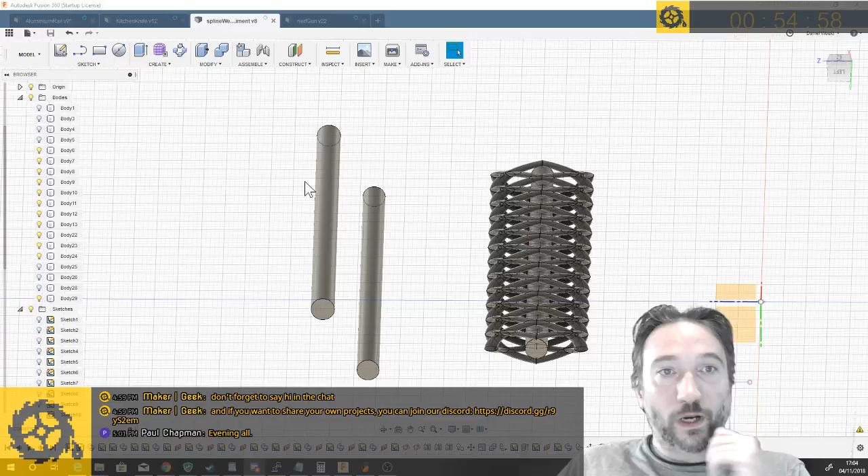Right, let's just get on, plunge right in. Five minutes in already, no time to waste. I did do some off-camera fiddling with stuff today.

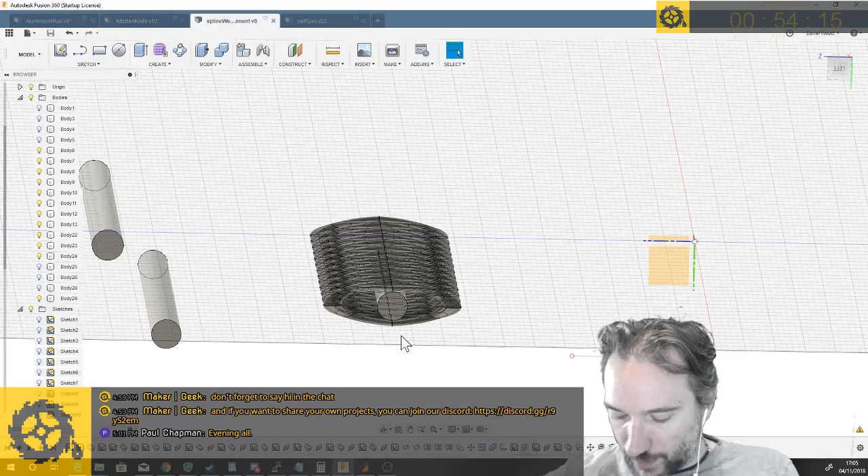So this is my little experiment pad where I've been playing with different kinds of latticey interlocking stuff. I came up with this fella, which I'm quite happy with, and it probably represents what I could have done in the first place - which I hadn't thought about. I feel like Philip, who's in the chat, did say right at the beginning of me playing with this, 'hey, why don't you use spirals, interlocking?' And I thought, well, I don't want it to be so consistent - I guess spirals are a lot rounder than I wanted.

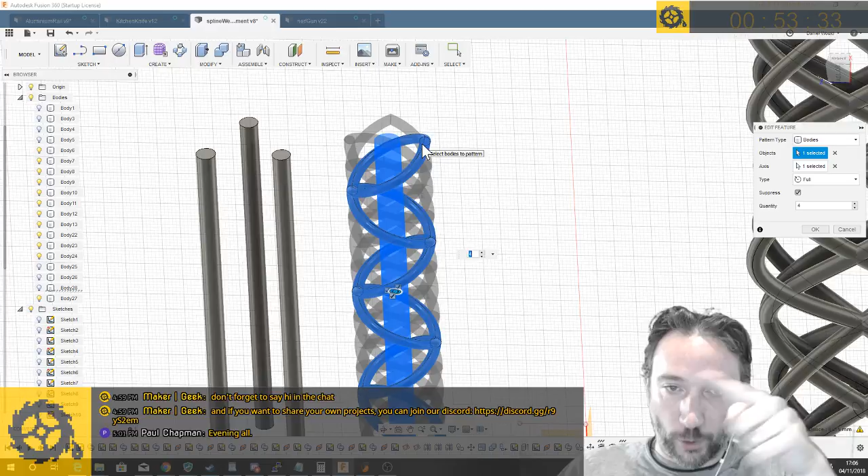What I realized today was, of course, I could do spirals, which is exactly how I created this. Created a couple, flipped them - in fact I ended up doing a rotation job, I think. Here you can see, if I edit this feature, you can get back to see how I ended up having a couple that I just interlocked and rotated. In fact, I didn't mirror them - I just created two and made them rotate in opposite directions using that tool. Then I selected them, created a cylinder so I could have an axis down the middle, and made 4 copies, which gave me this interesting tube effect.

But then what I did was a non-linear scale, or non-uniform scale I should say - I scaled in the x-axis down to about 30% and left everything else as it was, to leave it with this kind of funky squashed thing. Then I just put a cylinder down the middle. Quite happy with how that looks. That may also feature later with the NERF gun. But that's probably all I'm going to say about that for now.

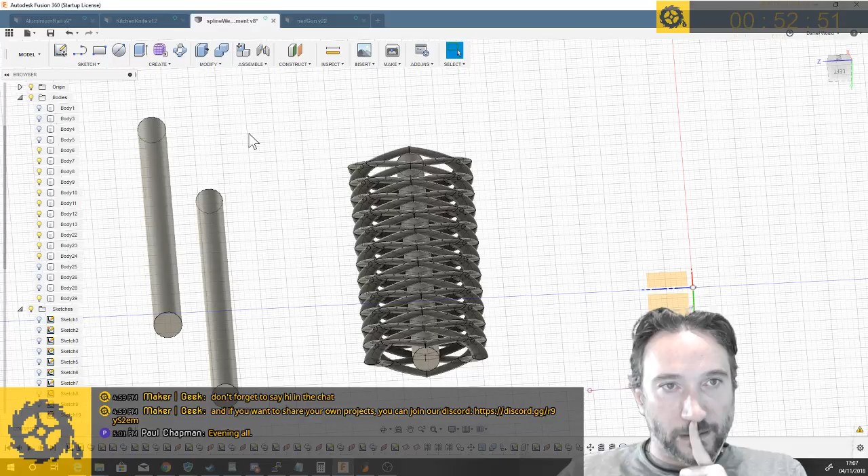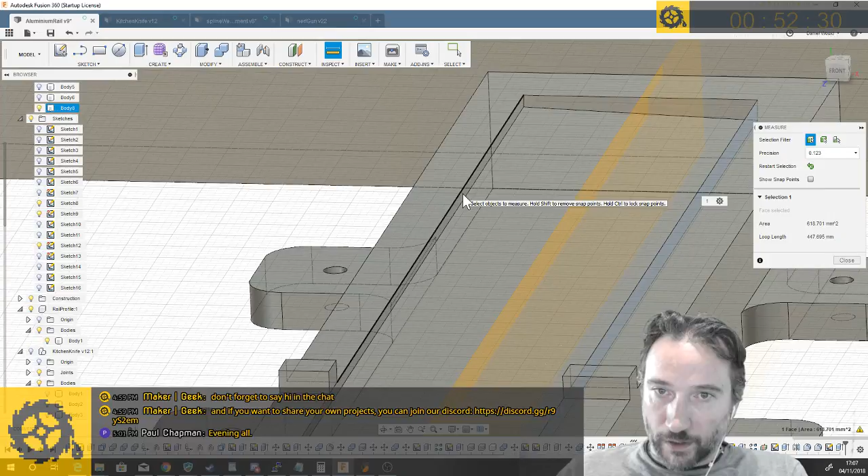Let's go check the bevel here. I want to double check that I didn't just screw this model up, which led to it being the wrong size. So let's measure between that surface and that surface. So yeah, the model is right - that should be 30 mil. But that is not how it came out. That's interesting, that is very interesting.

I've not come up against precision issues before with the 3D printer, but that is definitely at least half a mil off from what it should be. So I can make it slightly bigger, give myself a little room, and reprint it. But maybe I should also investigate whether I'm getting any slippage in, I guess it would be the y-axis on the 3D printer that would cause that. It's very consistent - it's not warped, it's pretty straight. It's just not quite right.

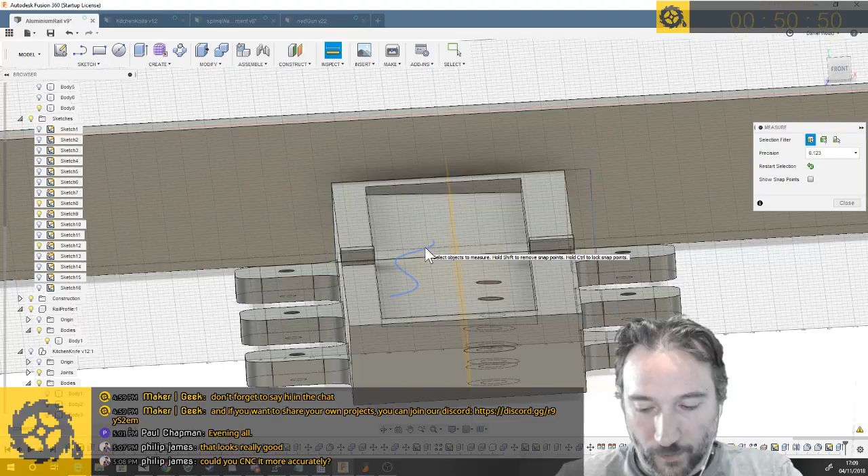Okay, because what I was going to do, assuming that was all going to work, was create the second one of these - the version starting from a blank piece of tool steel - and the second version would need the support for the first bevel on the underside. Philip asked, could I CNC it more accurately? With my CNC machine, not really - I could, but this is not actually a straight cut, it's an angled cut, and obviously I can't do the angled cut on the CNC machine. The whole point of this was to be a precise support for the specific angle of the bevel - that was the thinking.

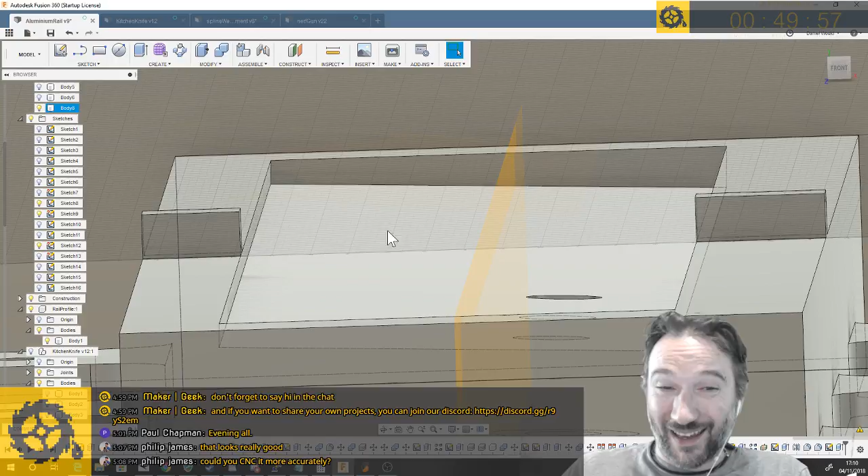So it's only half a mil, so I might just bolt it in place anyway. In theory those bolts need to be strong enough to hold, or held tightly enough that it's not going to move under filing anyway. The other thing is I put these raised blocks in, thinking that would - if I switch on the knife for a second - line up with this hilt section and help make sure I have a stop block that I don't over-file past, to get that nice clean line there.

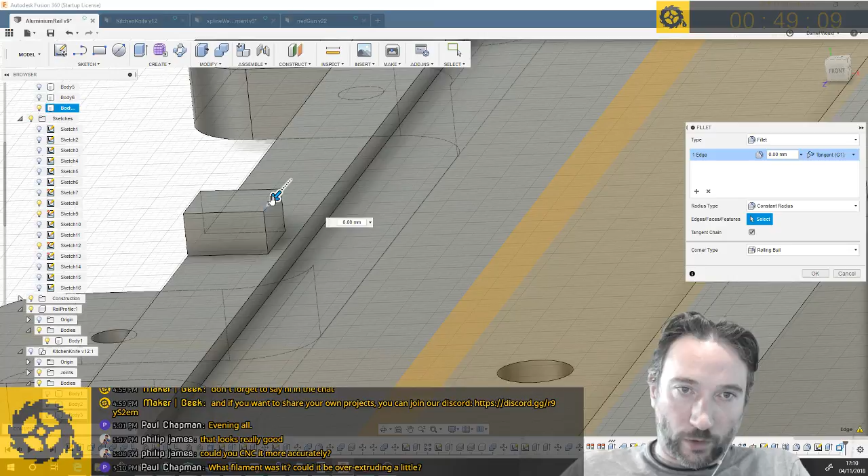But that's actually a little bit close, and it made it a bit difficult to get the metal even down past this point, so I'm just going to tweak this thing quickly. Let's drop it back by, say, 1 mil. Actually, I can probably even chamfer or bevel off that corner a little bit - that doesn't matter. And if I offset that face back by 0.5, that should be enough. I'll worry about whether my printer is inaccurate later.

What filament is it? It's like the standard stuff I get off Amazon - it's like a Sunlu, is that right? Sunlu print stuff, I've got it here somewhere.

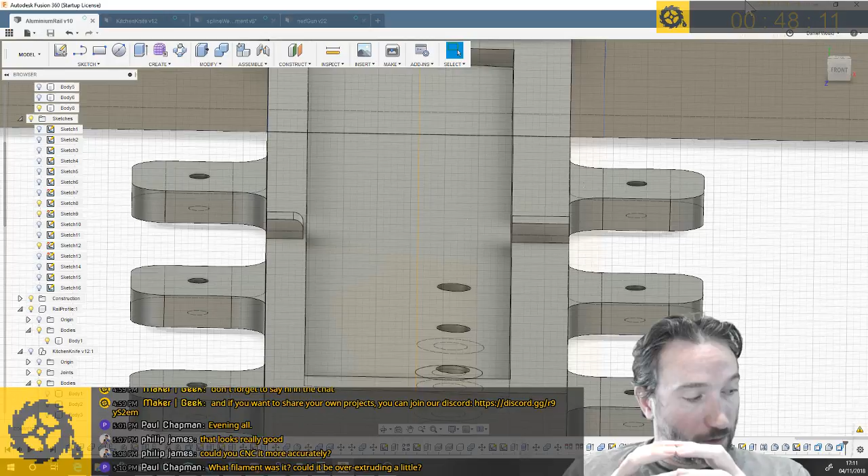It's relatively cheap off Amazon. I've not had any real problems printing stuff that needs to fit, but I'm trying to think if I've done many prints that needed to fit perfectly against a real world object. I've done a lot of prints that need to interlock with each other, and they've worked fine. Maybe it's squidged out from the lines, but it looks pretty good, has a nice clean straight edge. That said, now that I'm looking down the line, maybe there's a wee smidge of a bow to it.

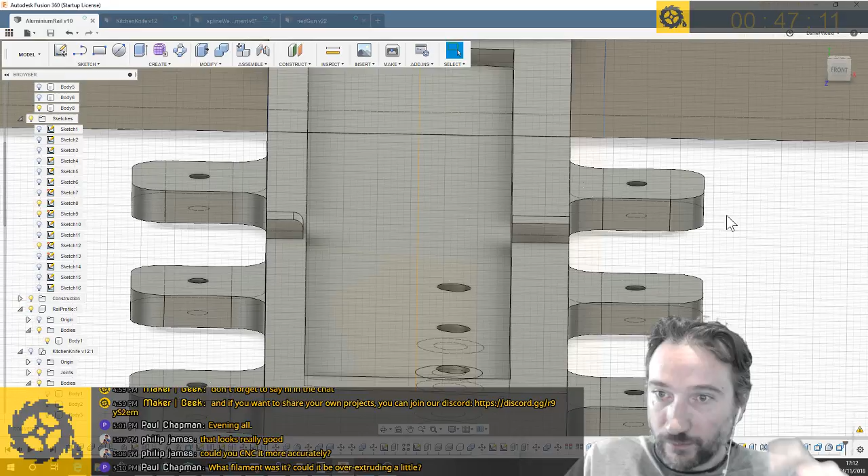Anyway, that's a 3D printing concern, we'll worry about that later. What I might do though, very quickly - now I could send this to print. I was thinking one of the things that concerns me about this idea is that it's quite a lot of plastic, a lot of which I'm sure I could get rid of. I'm just not sure I can get rid of it in a way that would make the print faster. There's always a trade-off of speed of print versus amount of plastic you're using.

I made it this full height, and actually that's another measurement I should check - it should be 28 mil, I believe. Oh no, not 28 mil, it's 28 mil minus the height of the thing below. So let me remind myself what that was. Is it 15 point something? 15.8. So for fitting within the jig.

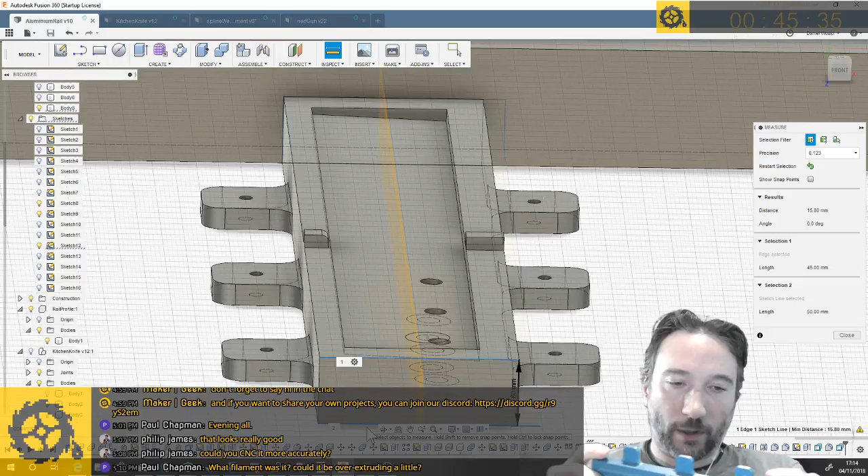I kind of wanted to 3D print the whole thing rather than just a shallow tray enough to get the bevel, because I could print just the top section and mount it on something else. Might be interesting to experiment with carving holes out, except it's only 20% infill anyway, so even though it's quite a large item, it's not like it's got a great deal of plastic in it.

It would be quicker to cut out, certainly, if I could cut this beveled angle, but short of doing an incredibly small CNC piece, I'd end up with steps along here, or I'd have to precisely mount a block at the bevel angle so this was a straight cut. I think it would be difficult to get the quality of finish on this shallow angle on my CNC, at least with the bits I have. Maybe I'm not thinking of an obvious option there. I suppose if you were cutting this way, it wouldn't be so bad.

Yeah, I don't know, I guess I'm also sticking to this idea that I kind of wanted this to be a 3D printed thing because I want my 3D printer to produce things that are helpful in this setting, and not everyone has a CNC machine. Even though I think my CNC machine was probably less expensive than the 3D printer. But there you go, right, it's part of the learning experience.

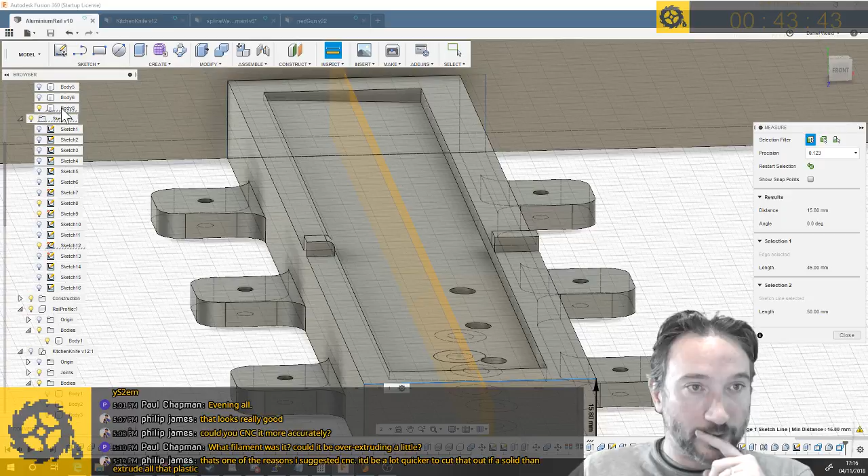So stop doing that, grab that, save it out. Medium is probably fine for the amount of detail. First side filing mount. Yes, what I should have checked is how much filament does it think that used? 27 meters, 83 grams of filament. I mean, often with a 1 kilo spool, 83 grams isn't that big of a deal.

What's that? I think they're like, it's not too bad. Let's open this bad boy up. Oh, I probably should have gotten rid of that one first. Sometimes I wish there was a way to select a side of an STL in a slicer and say put this on the deck, rather than me having to remember which axis to rotate around.

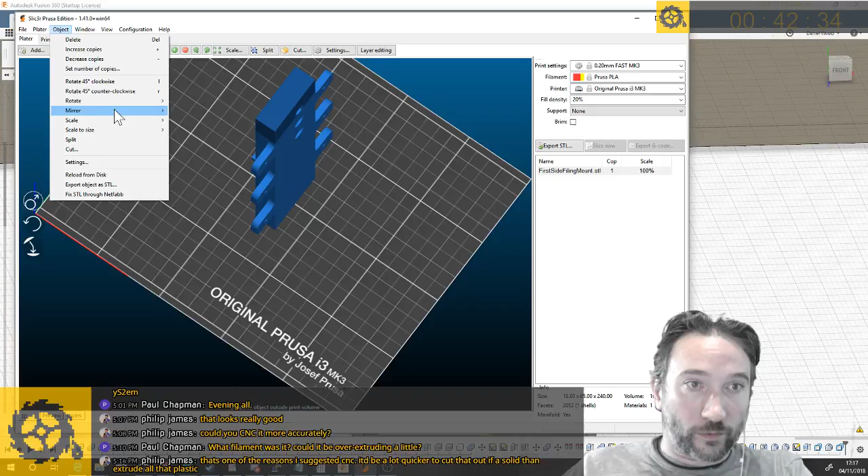Not that one, obviously. No, rotate around Y. And I probably need to rotate around Z. There we are. Just fits on the bed. That's interesting, I didn't actually think about the bed size when I was designing this. It just happens to fit just right.

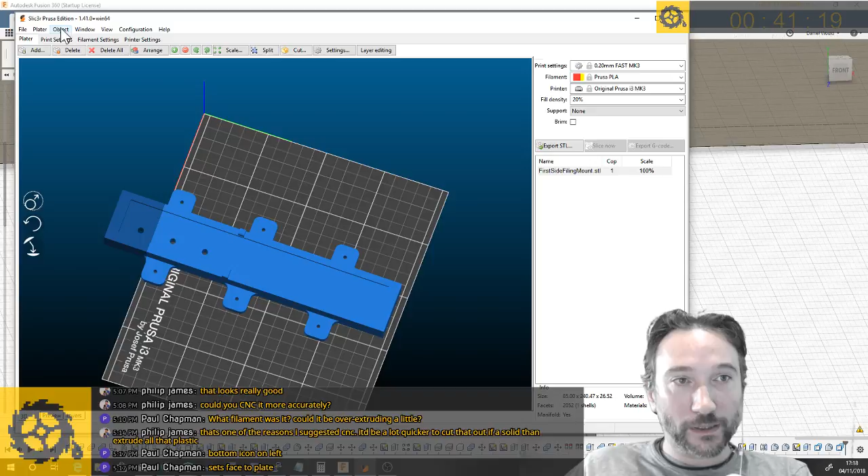Bottom left icon, bottom icon on the left. Oh, this thing, see this? I don't know if anyone listens to Reclaimed Audio podcast - they did a worth the price of entry episode this week. I think learning that right now was worth the price of entry for me. I realize that's kind of the wrong way around given that I'm hosting this thing, but worth me doing this to learn things from people who actually read the manuals. Awesome, that was good, right.

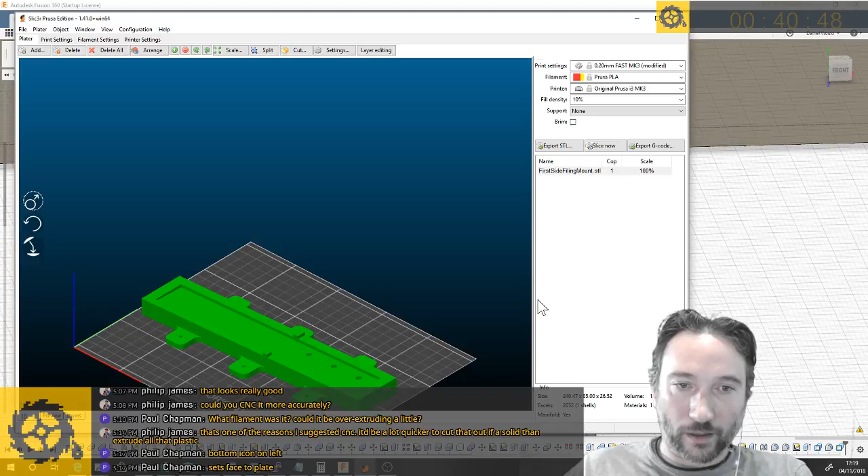Slicey. Do I even need 20% infill on this thing? Should I? Let me pull that back. I reckon 10%, I'm going to go really low density because it's just going to be screwed down and filed over - it doesn't really need to be a strong part. It's not under any kind of compressive forces or anything, or even bend forces. Let's check the preview.

Oh, that's interesting. Did I? Hang on a second. Apparently when I set something to the deck, I selected something slightly wrong. Let's try that again. That's better.

Okay, sliced out. Always check the preview. That's the lesson. Always check the preview. And there we are, looks good to me. Export. Boom.

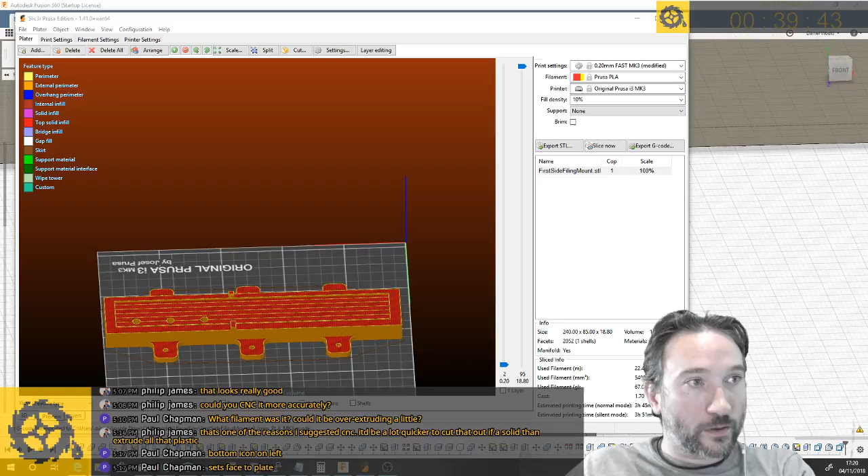Going. So terrible for a CAD based live stream. Spending time to set up the 3D printer, probably not great, but if I set it going now, it'll be ready by bedtime.

Hang on, let's get that there, do that there, replace, and eject. Fantastic. Let's do that.

I'll tell you what, I'll switch on the camera. Boom, so you can see that. And let's switch you on quickly. Just gonna wipe down the bed, set it going, and then we can get on with some

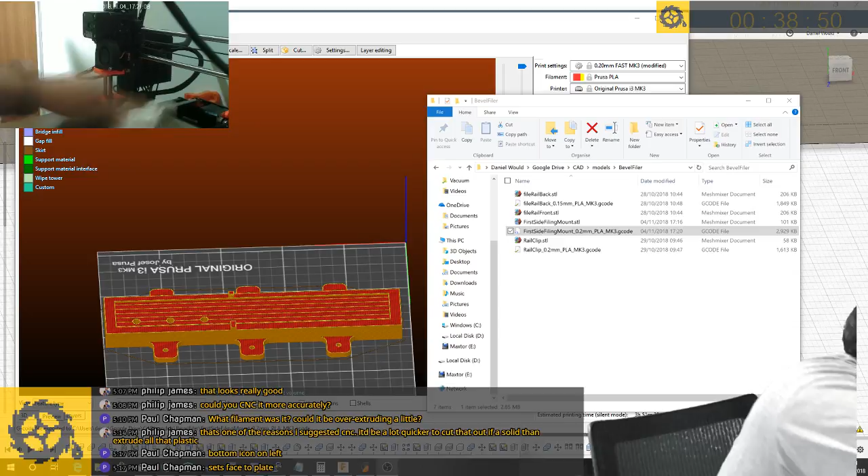Nerf gun. There we are. Always keep some rubbing alcohol in hand. Print, print, print, and go.

Right, marvellous. That can get its print on in the background, and we can return to actually doing some CAD.

So to export the STL in the same orientation as Fusion, go to Preferences, General, Default Model. See now this, I'm just learning so many useful things. General Default Model. Where am I looking? Default Orbit Type, Default Model Orientation.

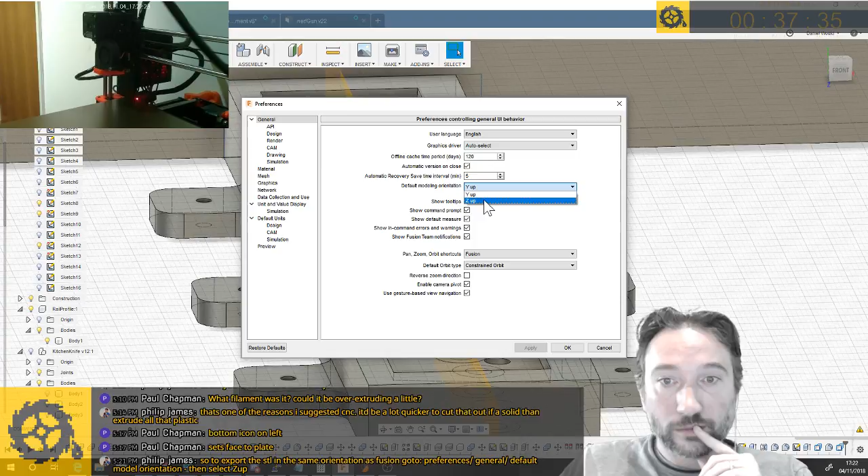Z up. How about that? I'll just do that then.

See, smart people in the world that have actually learned these things. This is probably because you guys also watch videos of people who know what they're talking about, and not just some idiot who's flailing around.

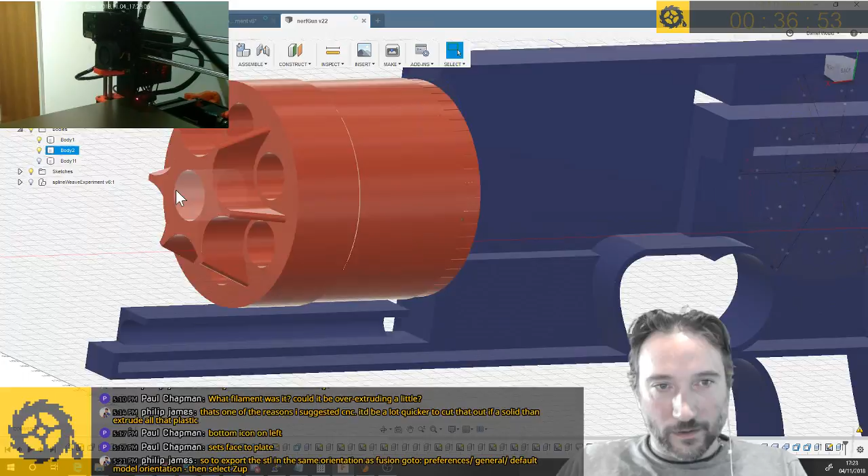Ah dear, okay, here we go. Nerf gun time. 22 minutes in, we just yesterday fixed the alignment of this fella. I think we're close enough on this model, and what I now need is to re-establish what the front of this structure is going to look like.

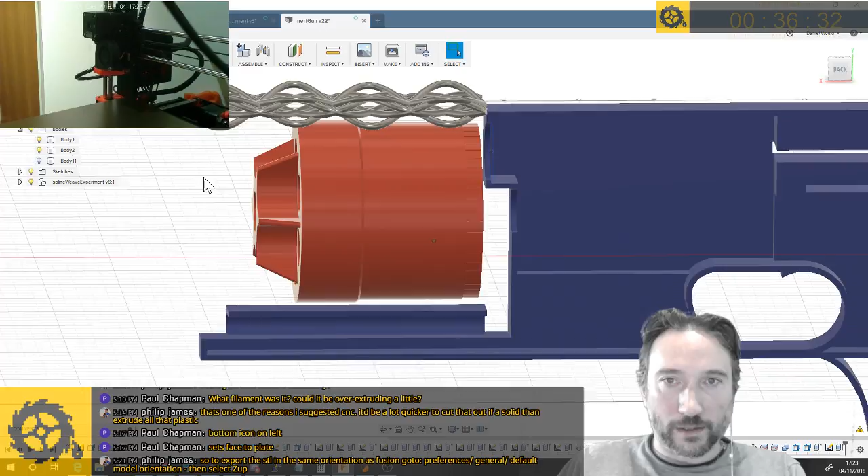So something has to come up from here and provide the front pivot point, and I need to support it across the top. Now I had been thinking about supporting it with this thing, but now I'm wondering about whether I support it with my other lattice.

Although actually the advantage of this one - oh, here we go, 3D printer is off, take that bit off - the advantage of this one is it does have this kind of natural support for this curve, so I think I might leave that in play there for the moment. It's 9 bodies, there we are.

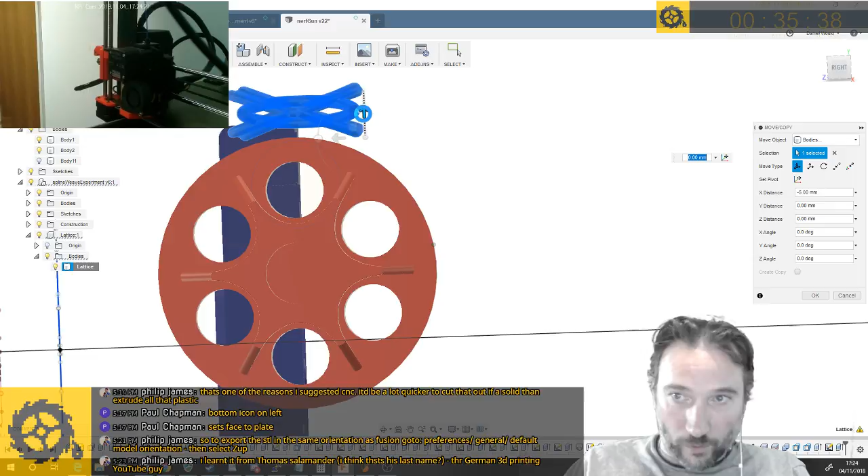Gonna move you back a wee smidge, and how far down do I think I can get away with? That might actually be as far down as I can get away with already, because I kind of need it centered.

Okay, what does that look like? German 3D printing YouTube guy. Yeah, I really ought to watch more videos. There's just no time to actually spend time in the workshop and do stuff and do this.

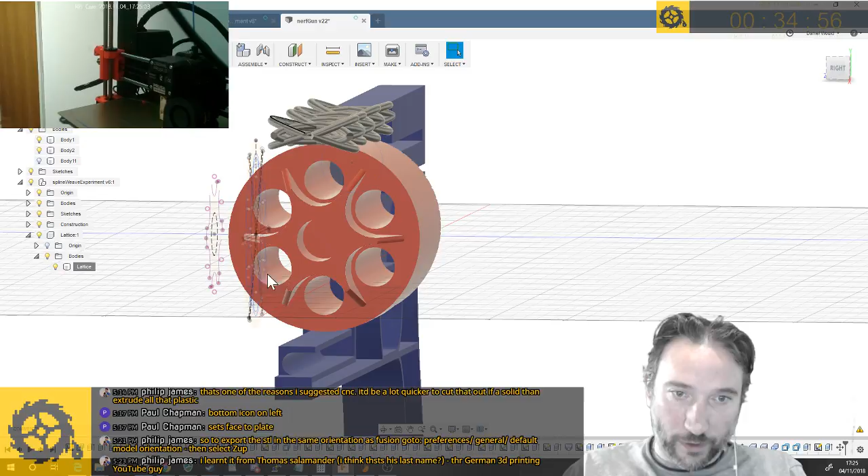Right, so I'm gonna try and create a connector that comes up to here. And I'm just thinking, what does that look like at the moment? So yeah, I haven't really thought about what I want the front design of this gun to look like.

I wonder, what if I created another lattice? Would that be crazy? I guess I'm getting to the point with this thing where it's a mixture of creating just the things that are important and creating things that are actually going to be interesting in the design.

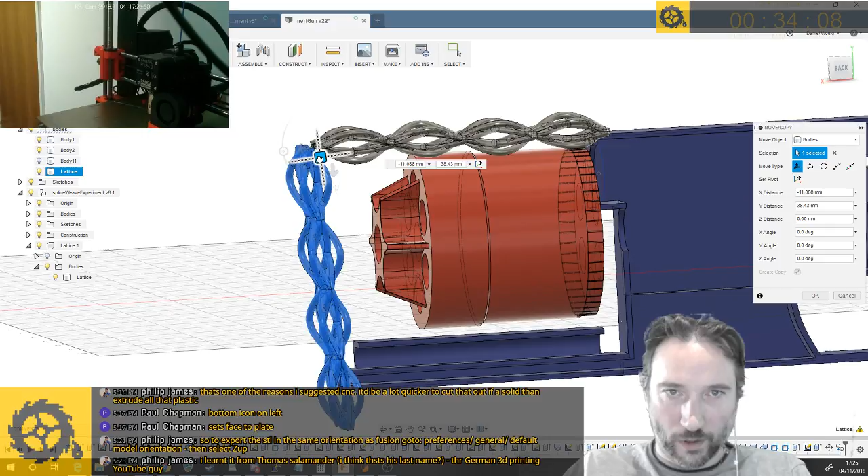I don't think this is going to look any good, but I kind of want to roll with an idea. So I guess I was thinking if I did use this mounted to there, but that would look kind of weird and wacky. I'm not sure about that.

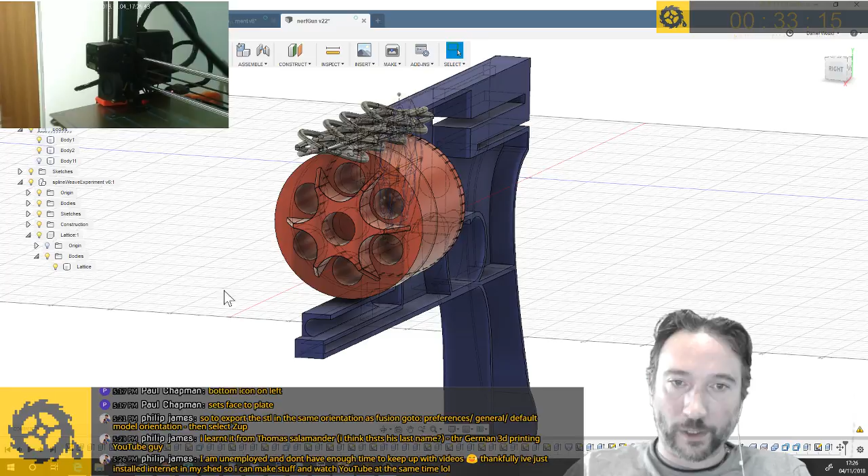Internet in the shed, now that is well worth doing. I do have internet in my workshop. Annoyingly though, I have a projector in my workshop, and I used to have it set up so I could project against something, but I fixed the lighting, got much better lighting, and moved everything around. So not only do I not really have a surface to project against anymore, it's also kind of way too bright in there for the quality of projector that I have. So that does not help.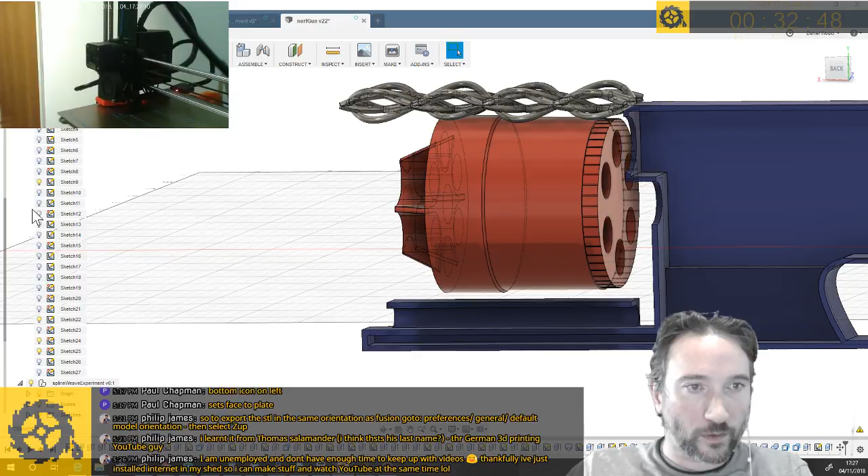Right, I am flailing a little bit because I haven't really thought about how to do this. I thought, did I not? Oh, I sketched on this surface. That's why there's nothing there, because I sketched and I didn't actually extrude anything. Right, I need...

This is just quite a narrow gauge. Let me remind myself how that fits into this. So, like that.

You're kind of... oh, dropping bits on the floor. Right, so yeah, at the moment this... oh, there we are, try and do that. This little bit here gets, I guess, clamped between the two sides of the frame.

Am I still live? Am I still here? Did that just go off the air briefly? OBS said that it just needed to reconnect. Nothing else seemed to indicate any kind of problem, but we'll see. I guess it will really be CAD like nobody's watching if OBS has disconnected me.

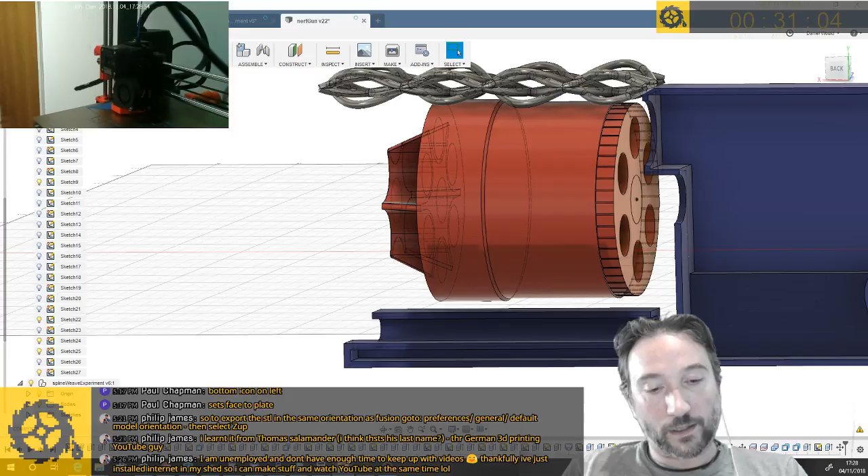So this thing is a wee shade under 8 mil. It's kind of 7 point, maybe even 7.5. Let's make it 7.5. So I'm gonna actually extrude the real thing, like a 7.5 diameter whatnot out of here.

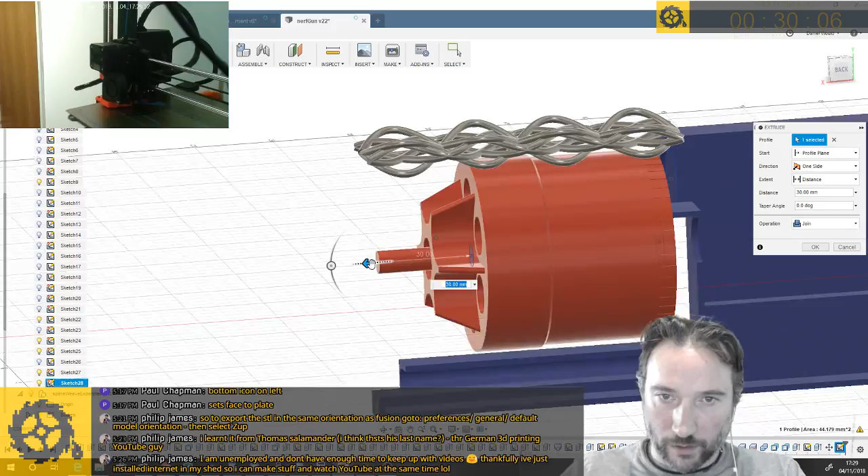It runs for me about, that looks like 15 mil proud of the top surface, and I'm now realizing that I am not doing it off of the top surface. I'm doing... well, let's just do that a second and I'll double check.

So how deep is that hole? That hole is 14 mil deep, so total extrude should have been 29. He says, pretending he can do maths. So yeah, I extruded 30. I think that needs to be 29. Right, so that needs to be captured.

And thus captured, we should be good. I'm a little bit nervous that nobody has said anything since OBS claimed that it was disconnecting me. If you are still connected and watching, do me a favor and say something in the chat. Either of the chats. Oh my goodness.

Let's have a look at, in fact, let me quickly... all good, thank goodness for that. I was worried for a second. So just quickly checking in here.

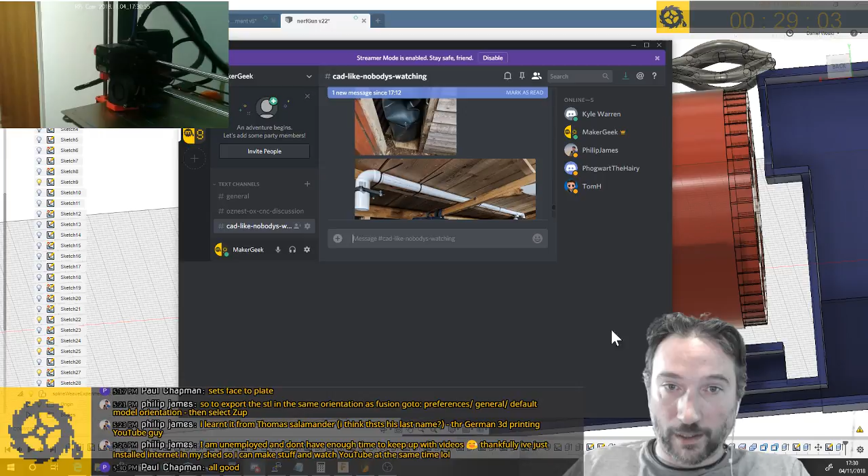Philip installed a Shopvac system not so long ago. Water butts do not make good dust collection buckets. Yeah, those dust collection buckets, they suck. In fact, I'm pretty sure that's exactly the same cyclone top that I have, and I attached mine to a fermentation bucket. That was definitely nowhere close to good enough. I ended up building out... oh, you built a box for yours. Ah, interesting, yeah, that's probably a really smart way to do that. I was like, I will not admit defeat, I've got this damn bucket. So I ended up creating wooden ribs inside of mine in order to give it the strength to resist. Wow, that is looking like some pretty serious dust collection for a shed. That's pretty cool.

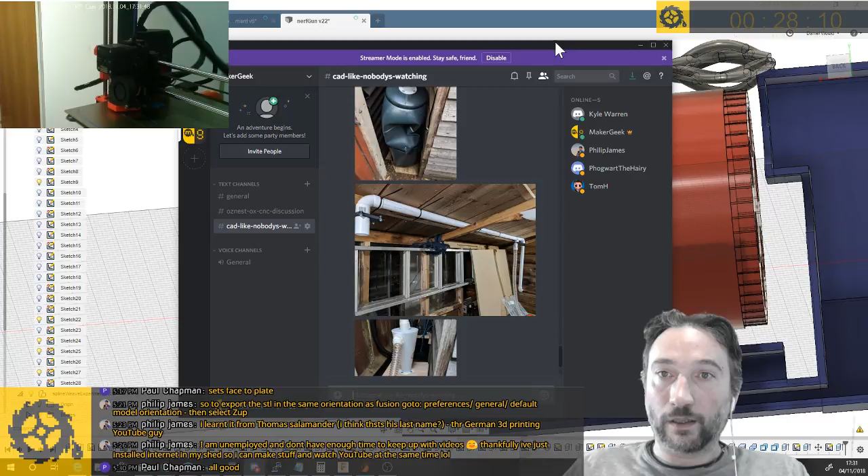That is definitely some good progress for a weekend.

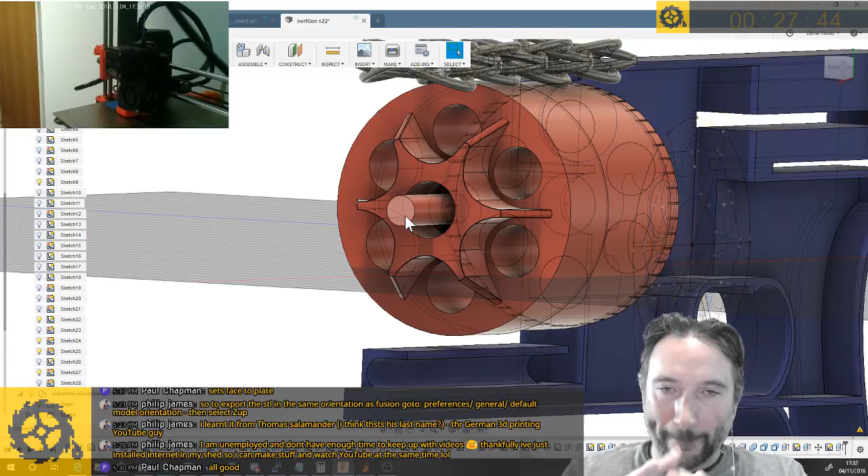Right, so back to this. We need some kind of support point, but I'm conscious that this represents the front of the gun. So what I might do is create kind of the minimum, and I'll come back and worry about embellishing any further gunness later. So that being said, it's interesting that this is a little bit further out than this.

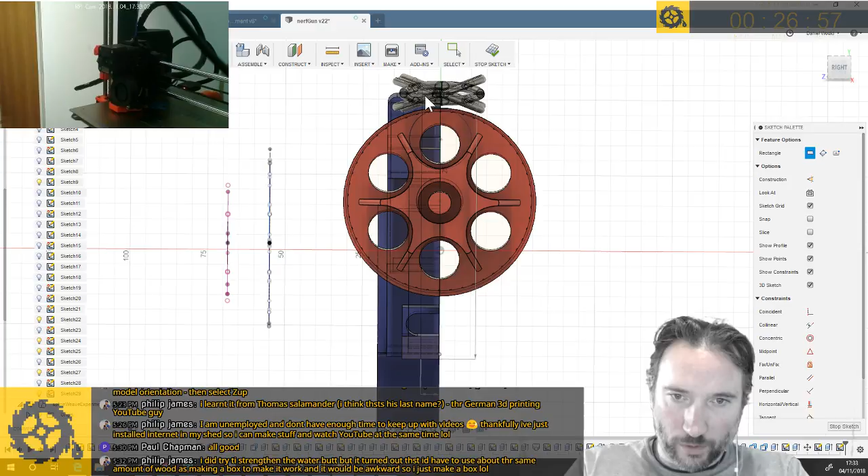Right, I'm going to sketch on this plane, and I'm gonna, in fact, yeah, if I just create up the halfway mark to about here, and we'll call it 88 mil high by 6 mil will do, and then we'll extrude that backwards.

No, not radiused, come on, extrude that. Except that can't be right because this gap needs to exist. Okay, we're gonna do it that way for the moment anyway. We'll make it a new body for the moment. We'll then use this to cut that radius out, and we'll keep the tool.

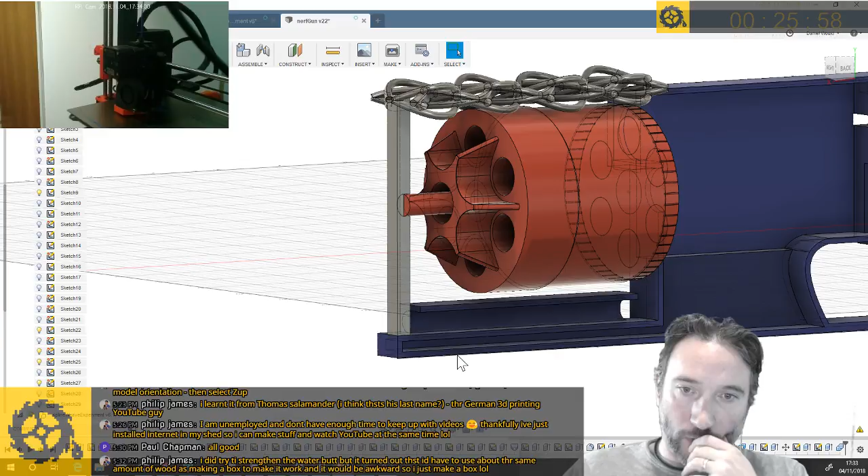Okay, and then I guess we'll join this strut to... oh, except of course, other important point, Dan, as part of your minimum viable version, that needs to not be there. So what I might do then is draw this out that way. There has to be a Y shape, I guess.

Autocorrect, like, I have no excuses, Philip. It's fine, my autocorrect is terrible, and my typing is terrible. Like I'm a dyslexic fool. I did try strengthening the water butt, but it turned out I'd have to use about the same amount. Yeah, I can see how that would work for something the size of a water butt. I ended up just having some scrap chipboard laying around, something like that, which did the business for me, but it was probably way more effort than it was worth. I should have just gotten the right thing in the first place. Had I thought about it, or indeed done any research, I would probably have discovered that sensible people do not try to use water butts for their dust collection.

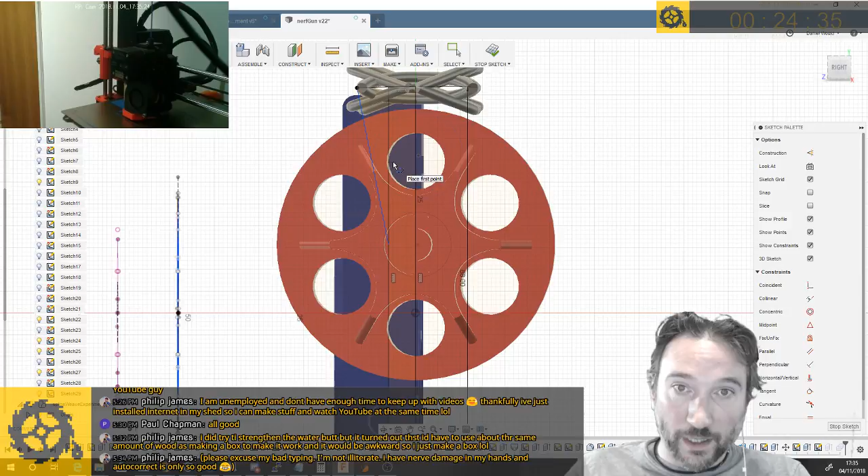Let's do that. I'm just going to improve this sketch into a Y, and let's draw another circle like this. It's kind of difficult to see, but I think if I do that and then modify my extrude to select this section and deselect... come on, I want that bit, and that bit, and that bit, and not that bit. In fact, no, not that bit either. There we are.

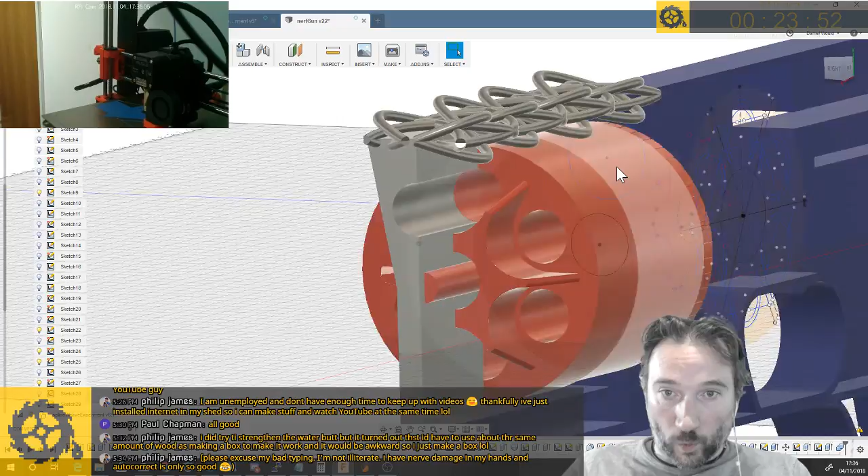Whoa, why is that now gone? Wait, what? Did I change the depth that I wanted to extrude it? How did that become minus 31?

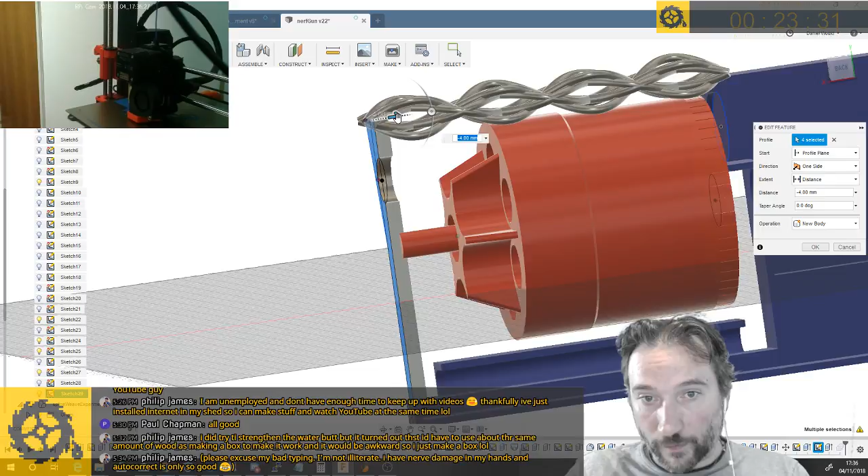That reminds me, I said I'd talk about the fact that I got into a real mess with an align yesterday, and it was pissing me off, frankly. So let's put a pin in that for a moment. Let's come back to this, in fact. What I discovered was that when I tried to do an align... can we look at the history?

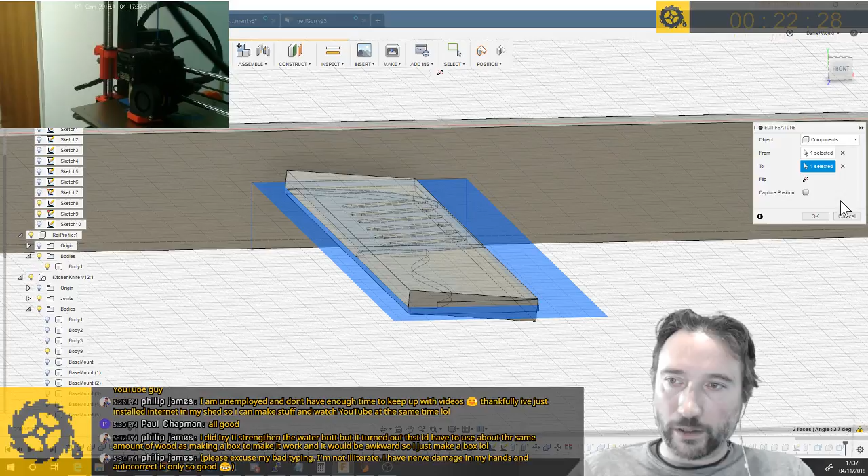So these two aligns was me fixing the problem. What I discovered was that when I did this align, by default it was selected on components, and even though it looked like it was supposed to work, when I selected OK, nothing appeared in the timeline, and it didn't act like it until I prompted a re-render, at which point it's like, oh yeah, there's no actual align in your timeline, and I didn't get any errors. So I'm pretty sure what happened was that I aligned, it looked fine, I went about my business, I did my cut, and by the time I did that, it was like, oh wait, that align didn't really exist.

So I don't really know why that happened, but that seemed to be the problem. Take that for what it's worth. It seemed like maybe that's a bug. Maybe not.

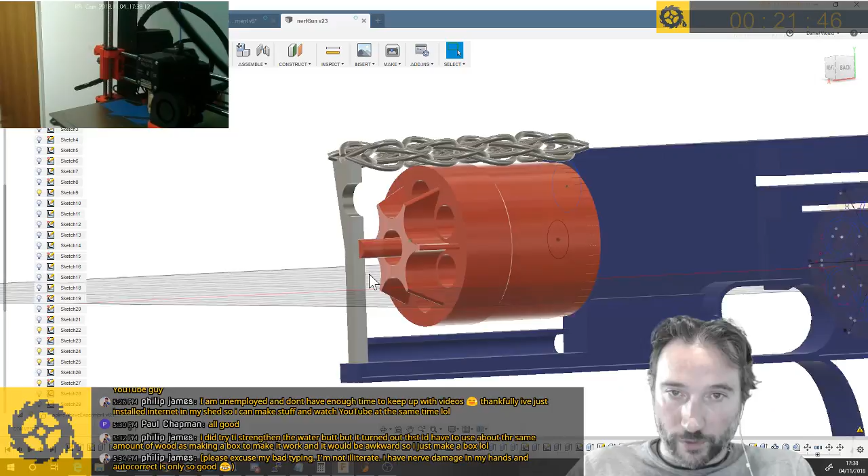So that is kind of a minimum viable whatnot for what the top of the gun, or the front of the gun, could look like. This is ugly, but that support would need to exist. This gap needs to be bigger, so I'm going to need to figure something out about that.

So this probably needs to actually curve down, because yeah, this... how do we, in fact... try not to throw things on the floor. In fact, as I say that—

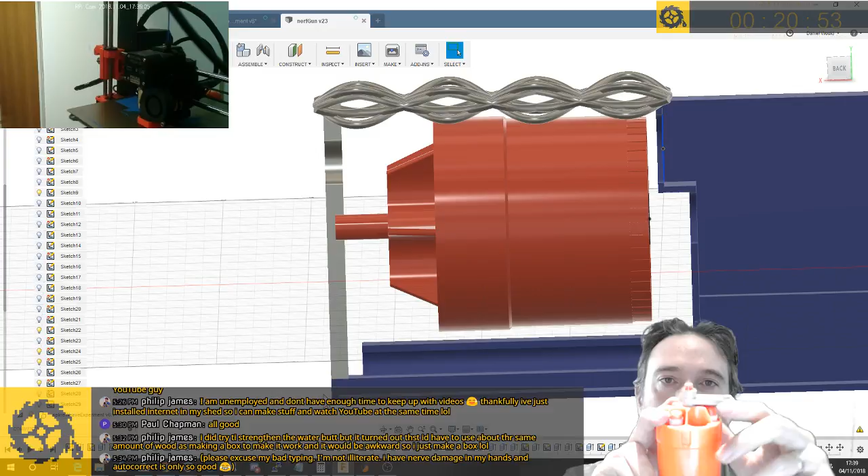That's interesting. So there's actually this plastic bracket that goes on the front of this thing, and now that I've put that in place, I'm realizing that it covers the entire height of that. No, okay, I was like, oh my goodness, I've caused problems. But I have realized that this notch only sticks out into the front of the gun when the barrel is in place, because obviously it needs to be free to fall out of the gun.

Right, of course. So when the barrel is in place, something at the back is pushing that rod through, and that's what engages it in that hole. But what that tells me is the measurement I just took for how far it sticks out is going to be completely wrong, because I didn't have it in place at the time. So it is in fact 19 mil proud of the surface when it's in place.

Now that makes sense as to why this gap would be all wrong, because this is all wrong. Right, fine.

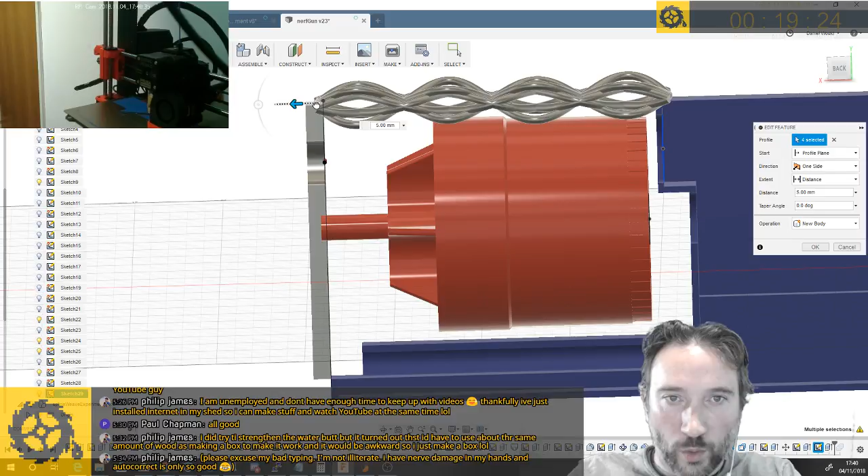What we'll do then is come back to this extrude. We'll extrude it out an extra 4 mil. That's right, isn't it? 33. So that's what you look like when you're in place. Then we'll come back to this extrude and extrude it the other way—come out that way instead of that way. And actually, now we can select that bit as well. Boom. That might be a wee bit shallow, but it'll do. Okay, that's more like it.

Let me just check a few things. Why? Oh, goodness. Just making sure there's nothing else in the Discord that I'm missing because of the scrolling. That's all good. Right.

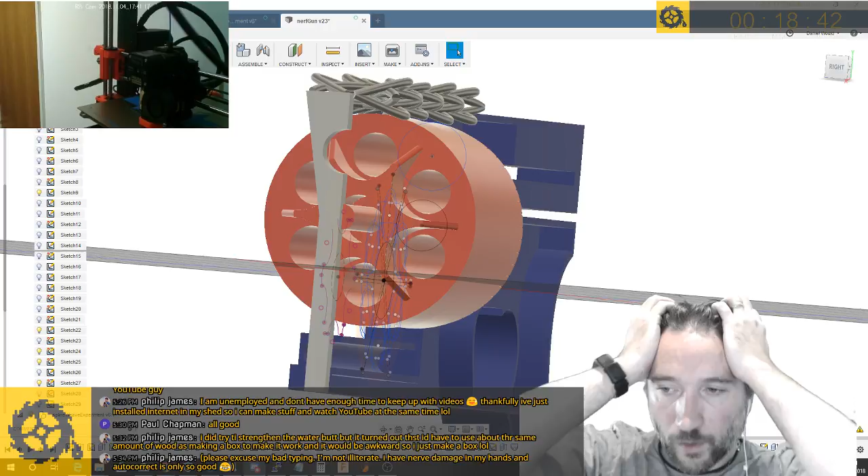How are we doing? 20 minutes. So how long ago did I start that print? It is still on the first layer. I guess the first layer is super slow to lay down. Once it's gotten past that bit, it'll pick up speed. But, right.

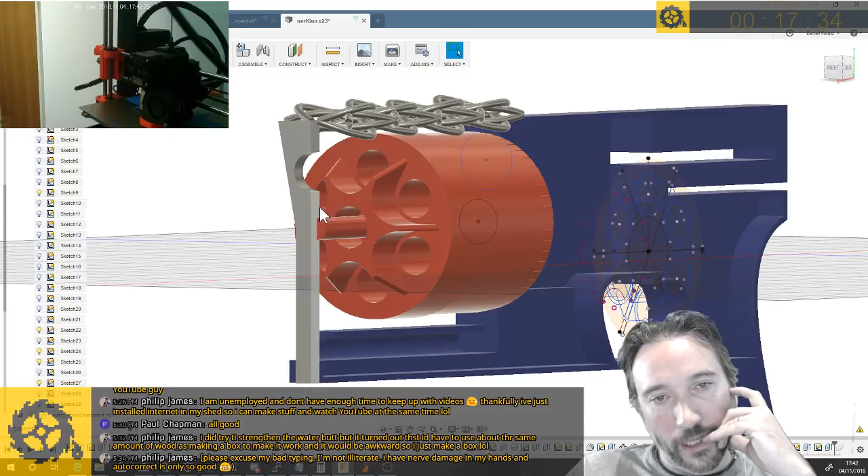So that support needed to exist. I can probably combine this with the gun itself, but I kind of want to think more about what I actually want the front of this thing to look like. I suspect, in truth, I might want this thing to be a bit more sinewy—that's not really a word—but this kind of whole structure is not ideal. I just need that support point though, don't I?

Okay, well, I guess the good news is this, I think, has space for the bits that it needs to hold. And so what I should probably do is model a couple more of the internal components that I'm going to need to keep, because that was a key element of the problem that I got into. The reason I had to fix those things in the model was because I didn't do that for some of this stuff. So what am I going to pluck out of here? I guess this thing.

This thing is the real heart of the gun. It's got the plunger and spring and whatnot, the catch that catches on the back, and this whole weird mechanism that interlocks with the barrel to turn it around.

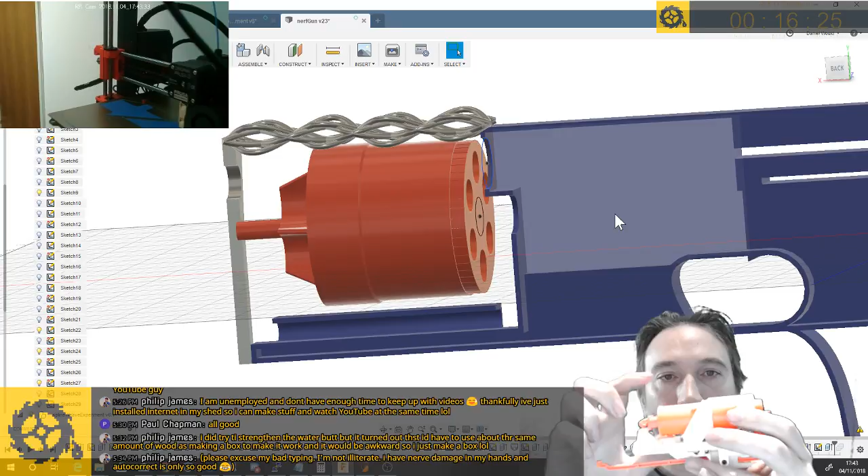So first things first, let's measure this cylinder, create that, think about what this surrounding plastic might look like. Broadly speaking, this thing is a cylinder which is 27 mil in diameter, and that bit of it at least is 85 mil long, and then there are a few bits that are slightly different diameters.

Right, let's move over here. Sketch - we'll sketch on. Oh, don't sketch on that plane actually, because it would make sense to sketch on a plane that's at least oriented with where it's going to go. We'll sketch over here though.

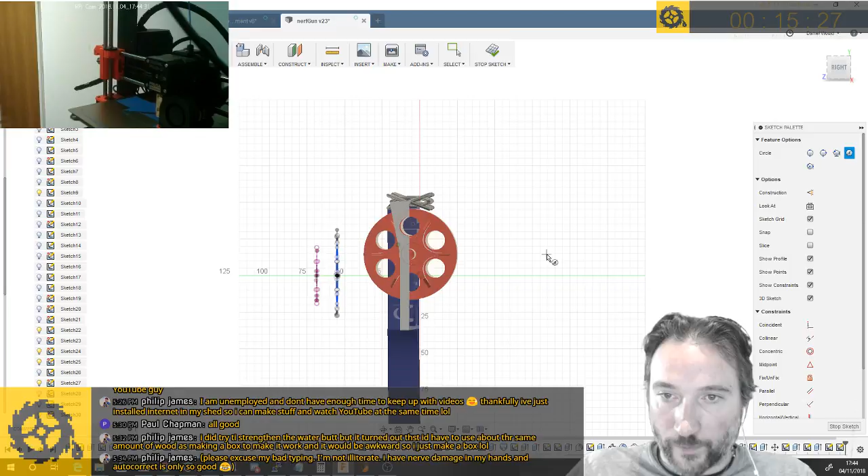I said that was 28 mil by 85 mil. Did I say 85? I did say 85 now, right? Yeah, which looks kind of about right. Then there's a little ribbed, larger diameter, what's that, 2.5 mils worth, that is up to 28 mil. Did I just say 28 mil? 27 mil and 28 mil.

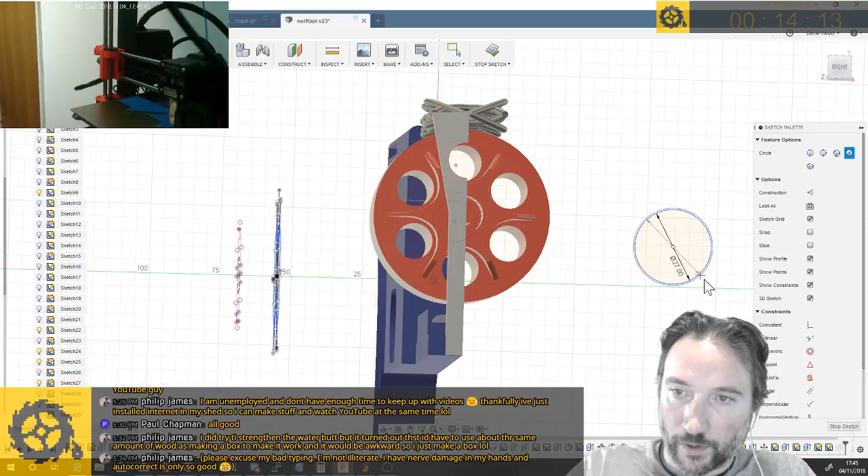Okay, I got that wrong. So that means I just modified that a second. Yes, come over here. 27 is what that should have been. Let me actually, whilst I'm here, draw the sketch for 28 as well. I suppose I could have just done that the other way. Stop sketch, turn that sketch back on.

Let's just zoom in on that a second so we can extrude that out. That was 2.5 mils that way. Well, that didn't need to be a new body - that could have been a join, but we'll join it in a second.

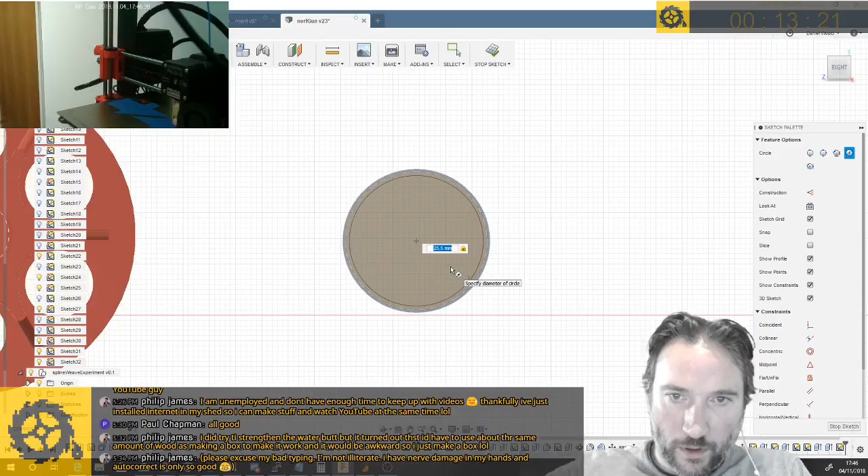And at the front, there is another 7.5 mil, which is at a narrow gauge again. That is down to 25.5 at the front. So let's do that sketch on the front. 25.5, and extrude by 7.

And then there's kind of a flat bit. I'm not going to worry too much about the flat bit at the moment. What else do I need to know about this piece to be able to use it? It's got like a weird springy prong bit - that's not such a big deal.

And it's got like a little foam gasket, which is another, what looks like mil maybe. Yeah, it's like a 1 mil gasket on the front. Which let's just quickly sketch what that looks like, because why not?

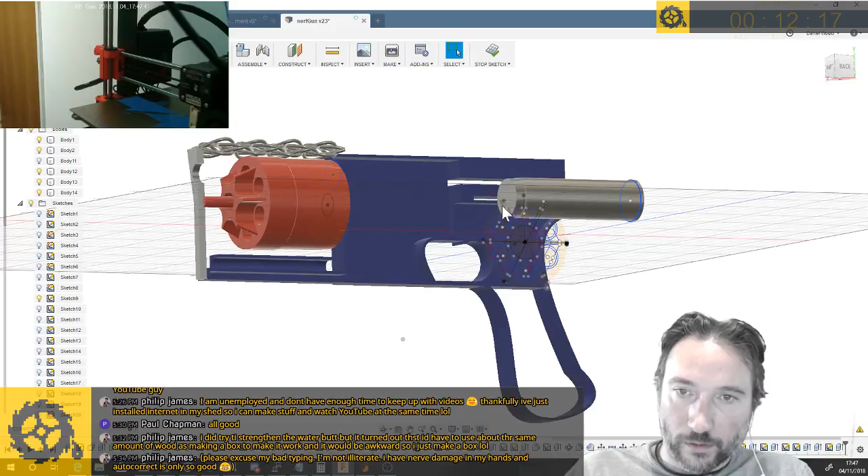Why sometimes I still haven't spotted the moment that it deselects from the thing that I thought I'd selected. So that to me, if I offset - just so you can kind of see that black gasket is what I want to model for the sheer sake of it.

So offset from there, it looks like maybe even not even a mil offset from the... maybe 0.8, 0.8 offset.

Come on, do the thing. Fusion is unhappy. Right, so that's that, and that looks like we get to, if I draw a line from there, it's sort of about that height. 90 degrees, please.

Oh, why didn't my offset - why is my offset not showing up in this sketch? Huh? Why is my offset not showing up? That's kind of annoying. And why have I only got zoom for the moment? What, I've lost rotate. Fusion, you confuse me on a regular basis. What is going on? What is going on?

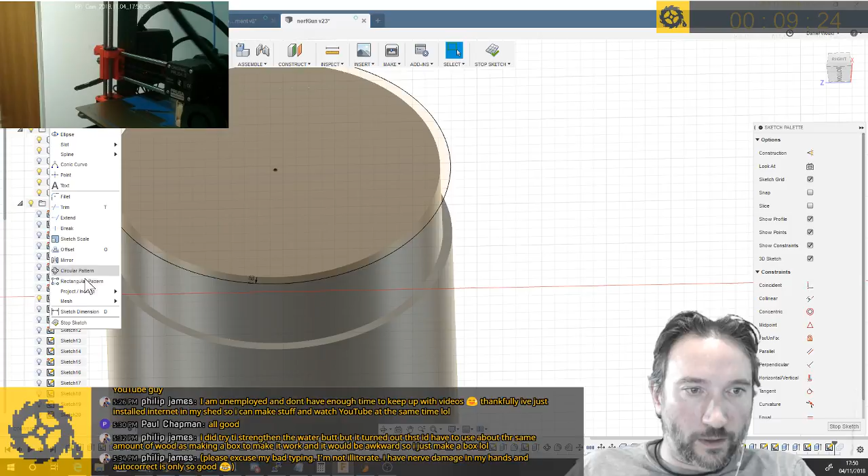Okay, delete that, try this again. Offset from here, the other way please, 0.8. Okay, was that so hard? Was that so hard?

Why am I no longer able to rotate with my space mouse? It feels like every single time there has to be something - there has to be something that just freaks out. Let's do that.

I would just kill Fusion right now and reopen it, except that it's too close, I don't have time. I kind of am also at that point where I'm like, was it really worth me?

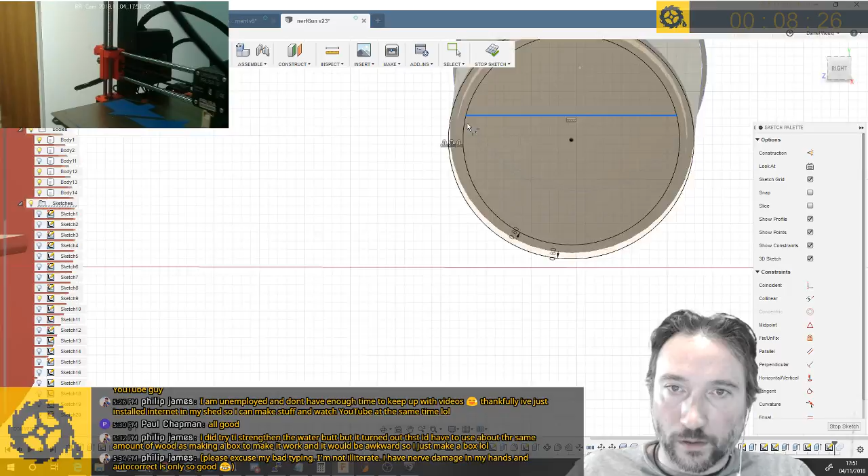Can I fillet this corner between here and... no, I can't fillet between a line and a curve. Fine. For right now, because this is already beginning to bug me, I'm just going to extrude that bit by 1 mil for the sake of getting the dimension idea.

It doesn't really matter what the shape of that gasket is. It's more important, I'd guess, to figure out what this plastic holder is doing. How to model that guy?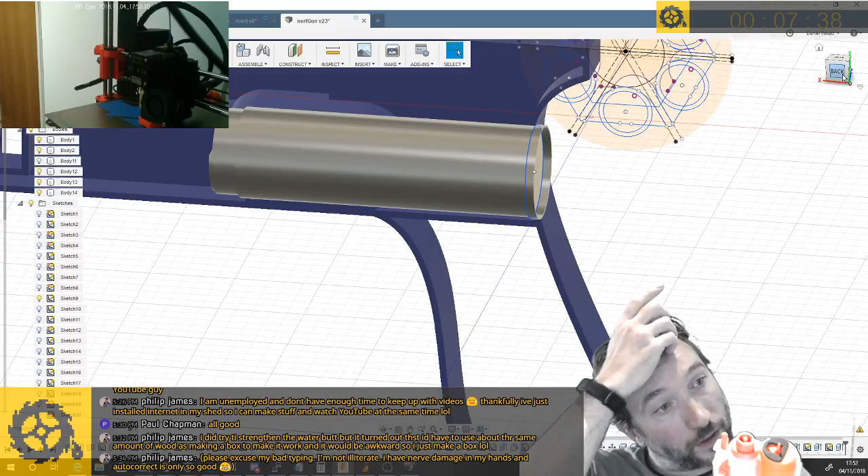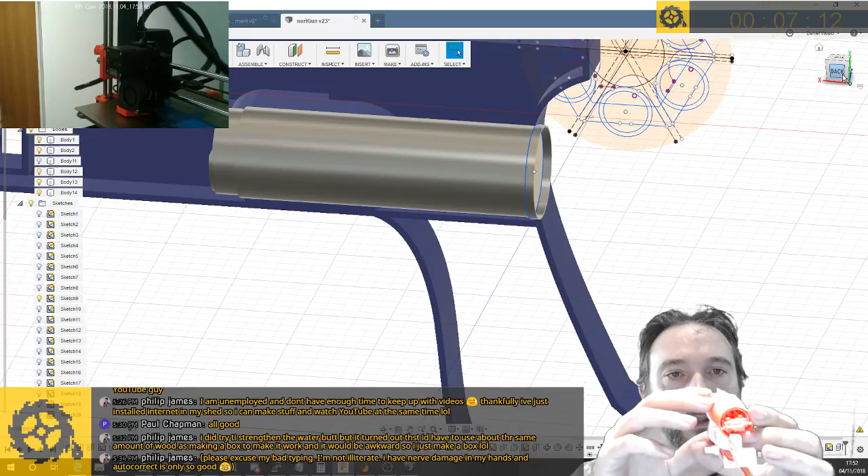I do not know. Thoughts? It's kind of got 2 sections on one side and 1 section on the other that reach around it. So I suppose I could model a thin cylinder containing around it these parts, and then cut chunks out of it. That might be the easiest beginning point.

It's interesting that it's spring loaded, it can come in and out a little bit. I guess that's because when you fire, it presses up against the back of the barrel section to create the air seal around the specific dart. So it's going to be kind of relevant to know that little piece of plastic is there, at least for the internal shape to allow space for it.

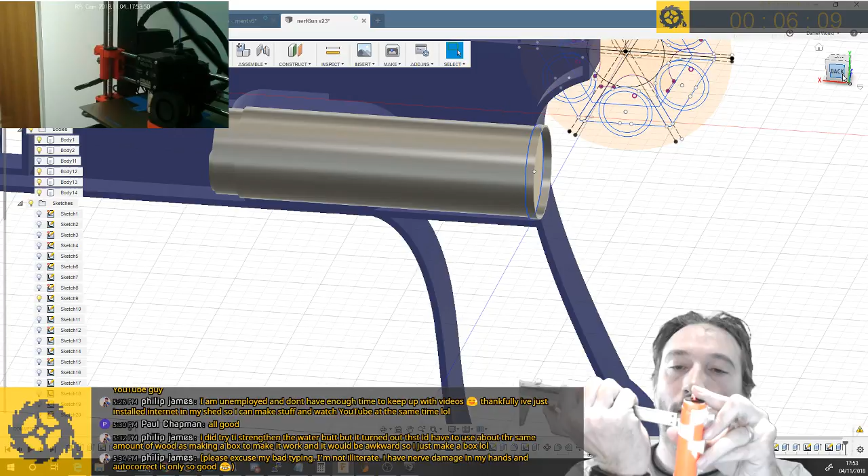So it's sort of a cylinder that is 31 mil exterior diameter, and it looks like probably 1 mil, probably 1 mil-ish, 1.5 mil thickness. Okay, let's do that. Let's create a 31 mil diameter sleeve for this.

Let's come and figure out the best place to sketch it. We'll sketch it on... oh, that's interesting. Oh, that's why you didn't join - because I didn't make you solid, which is kind of true because it is a hollow tube. But that's not exactly what I thought at the time. Right, okay.

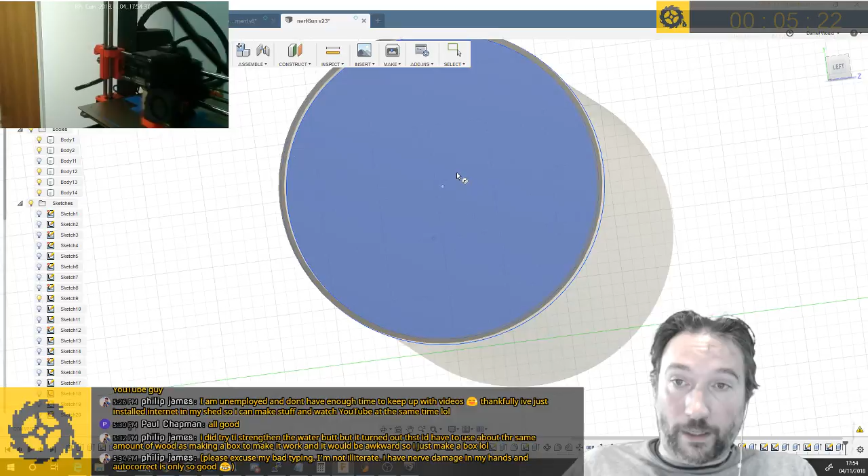Sure, that surface is fine. Select the geometry - you just saw me select the geometry of that endpoint, and now you jumped me over here. What are you doing? Go home, Fusion, you're drunk.

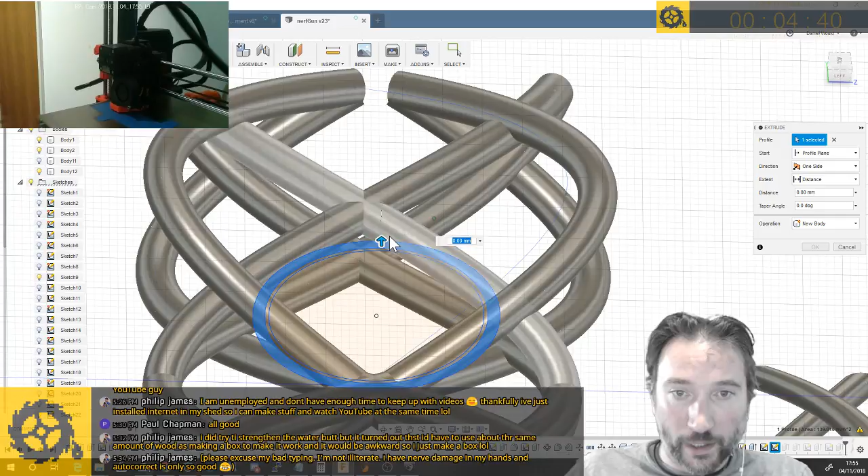Space Mouse is back. Apparently now it's fine, of course. So total length-ish of that is going to be sort of, well, let's do it to there - 67.

New body, and then we'll move it to its alignment. Bum, bum, bum. It's kind of about there.

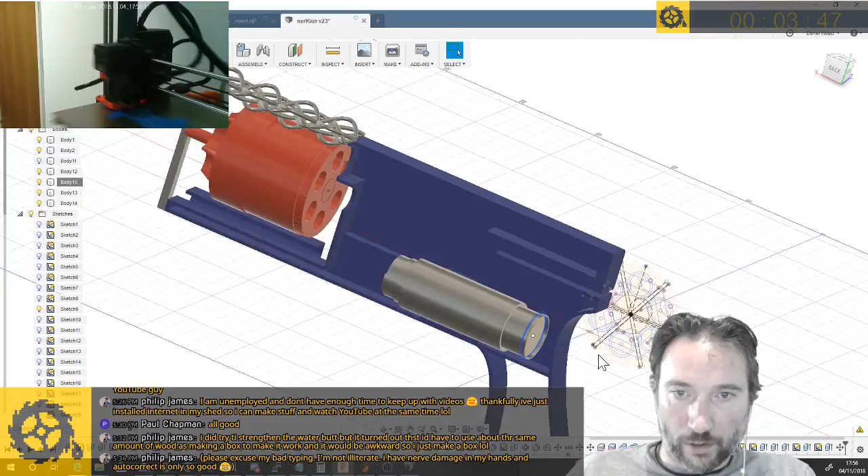Oh no, Space Mouse is gone again. I think I'm probably just over-pegging the server, over-pegging the thing. 3D printer's picked up a bit of noise now. It's into the fast parts.

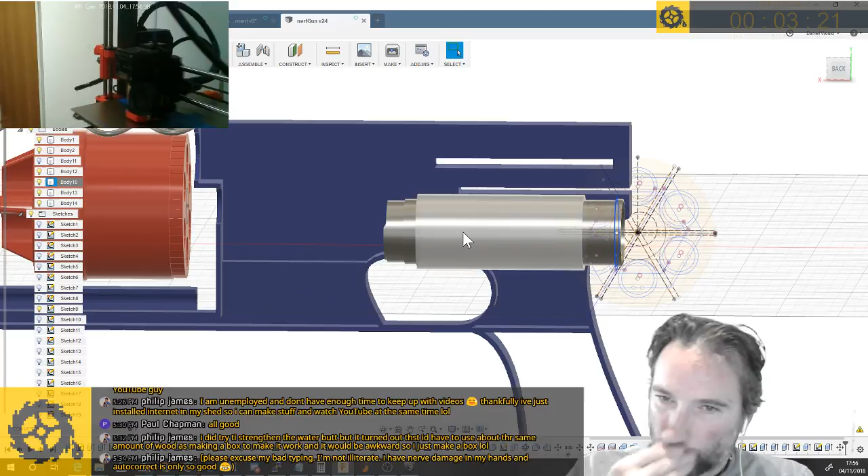Right, so this has some chunks cut out of it, but I've been trying to think about how I would model those chunks cut out of it. It's not super important. There's a ridge along the top.

That's probably important for the purposes of the model. The ridge along the top is basically a 1 mil ridge that's sort of rectangular.

Let's do that. Come on, why are you making me do this the hard way? Oh, my Space Mouse should work. It's so annoying.

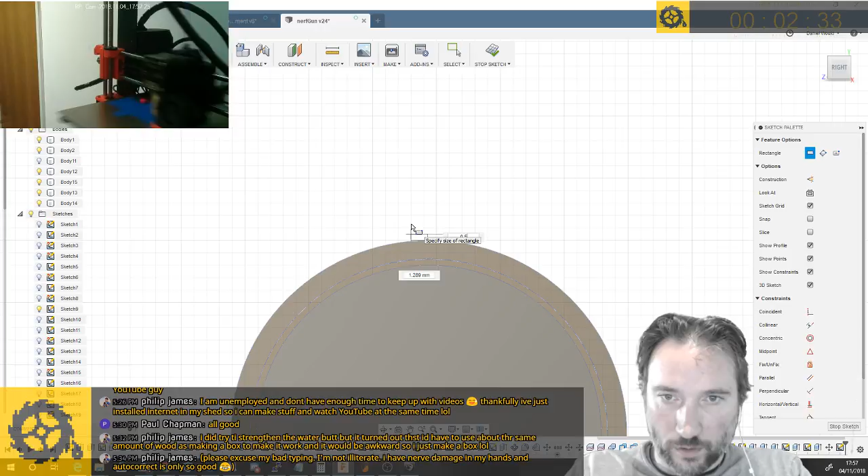Right, you will create a little rectangle which is 0.5 - oh sorry, 1 high by 0.5 wide - and then we'll create another one to the side, 1 high by 0.5, just to make sure it's centered, and then connect those external lines straight down to the circle.

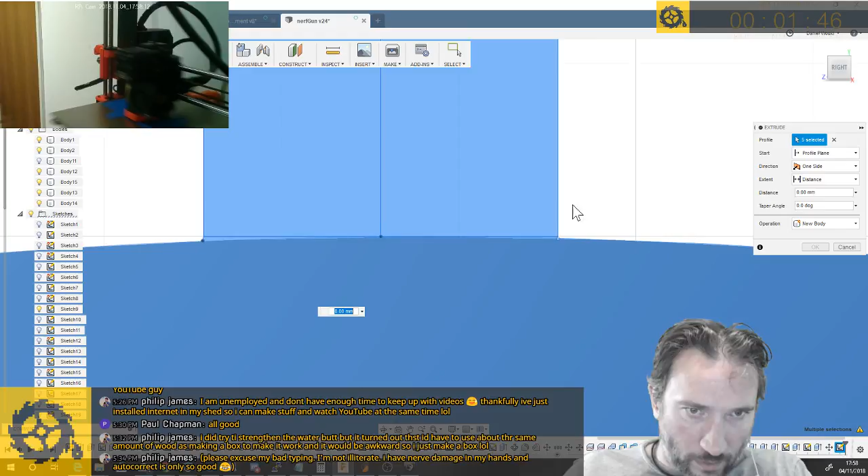Come on. Like that. Good. And then we'll extrude that. Come on, do the thing.

Good, extrude him back along his line. Space Mouse working for this bit - don't understand, Space Mouse, why do you work for bits and not others. Not cut, join. You don't run the whole length, you run until 43. No, minus 43. Excellent.

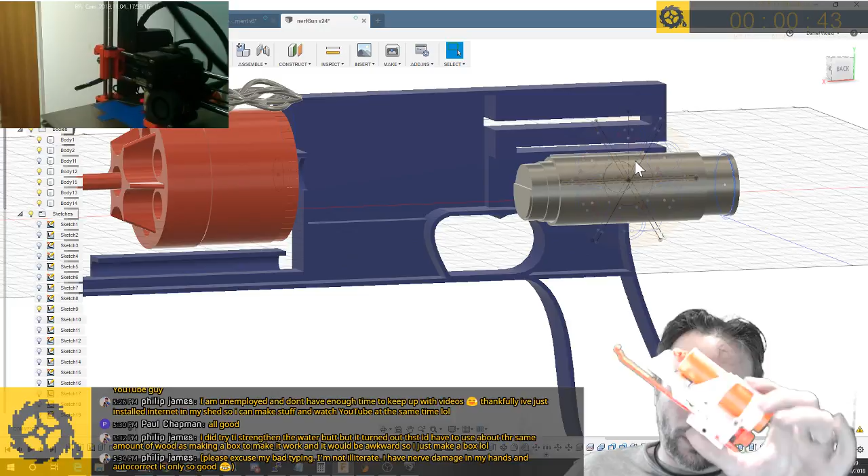So that will probably be quite important for how it fits into this section here. I'm going to need to do a load more tweaking on this white plastic piece. How deep should I go into modeling the exact parts of the internal mechanism? I keep kind of flip-flopping on it.

It's interesting practice to try and take a complex shape and model the whole thing, but then I'm not going to be creating this bit. So part of me only really needs to know where the contact surfaces are and just make sure I don't create something that clashes with it.

Anyway, we are out of time. That joint needs to go in the oven.